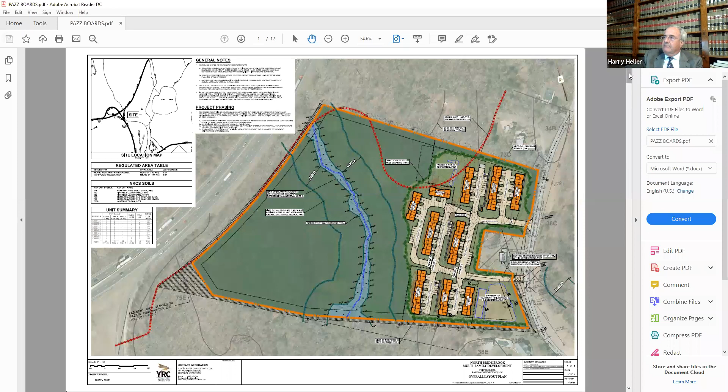Okay, I've now moved on to sheet 3 of the site development plan, which is the grading and drainage plan. You can see that we have 2 proposed rain gardens in the northerly portion of the site, incorporated into the design to capture some of the overland flow which is flowing easterly off of steeper slopes on the westerly portion of the site in the direction of the project. This allows the project engineer to capture some of that runoff and infiltrate it back into the ground in order to help attain the 0 net increase in runoff as a result of the proposed development. At this point, I'm going to introduce Brandon Hanfield to ask him to review with the commission the specific design parameters he has incorporated into this rather complex formulation that you see before you.

I'll switch, whatever you want. You want the biggest screen? Oh yeah, that will help. Okay.

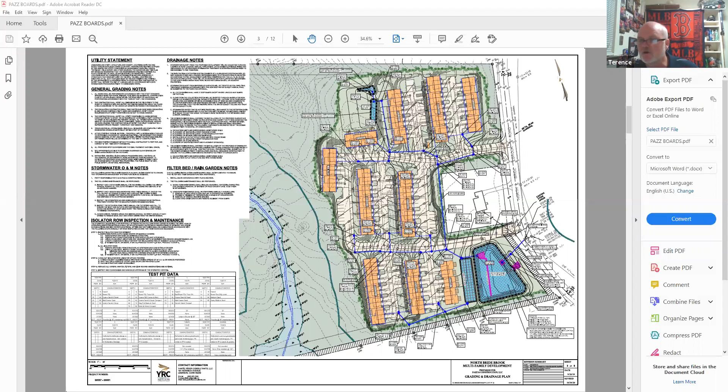Jim, are you there? Did we lose Jim? You can see him, but we can't hear him. He's not muted. Mr. Barbaras, can you hear me? Raise your hand. Okay, yeah, we cannot hear you. Jim, there may be an internal mute button on your computer. Remember we had a problem with that before? Yeah. Welcome to the world of Zoom. Mr. Heller, is there something else you could work on if we try to get this fixed? Yeah, well, let's let Jim try to figure this out.

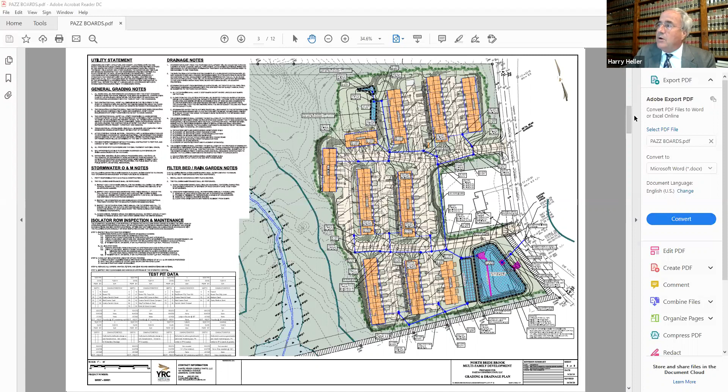So with that, I'm going to go down to the architectural elevations and ask Peter Springsteel if he could review with the commission the architectural theme for this project and how it's been formulated. Good evening. My name is Peter Springsteel. I'm a licensed architect in the state of Connecticut, and my office is in Mystic.

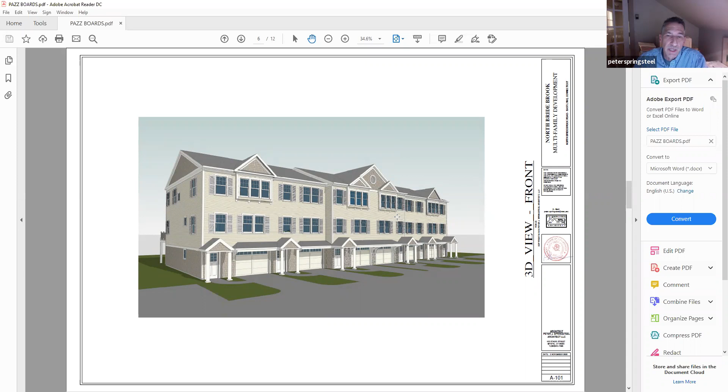So if you go to the next slide there. On the units that are built into the grade, you will basically have a retaining wall here instead of windows and doors out the back of the basement level of the unit. Your parking is beyond that, in the back or in the front really. And then these decks here will end up being more or less at grade, and then this grade will slope down on either side to the garage level entrance grade.

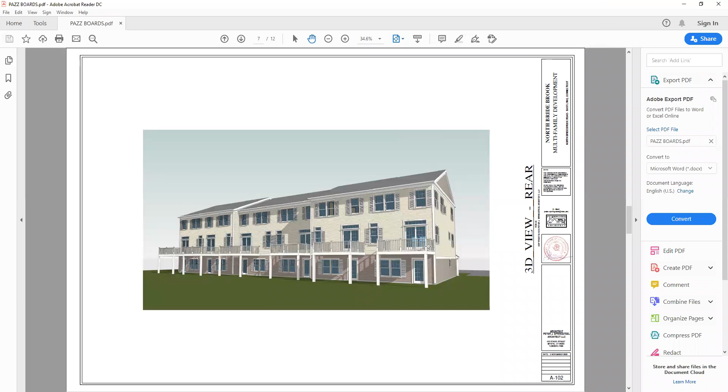The buildings' appearance will be New England style, essentially, with gable roofs, clapboard siding. You have shutters, double hung windows with simulated divided lights, which you can see a little bit in this diagram here, and then we would have architectural shingles for the roofs. Generally on the exposed bases, we use a different material, texture, or color to break up the height of the building, which you can see on the right-hand side there. And if we go back to the previous slide, you can see those breakups in the upper gable dormers and at the bases near the garages.

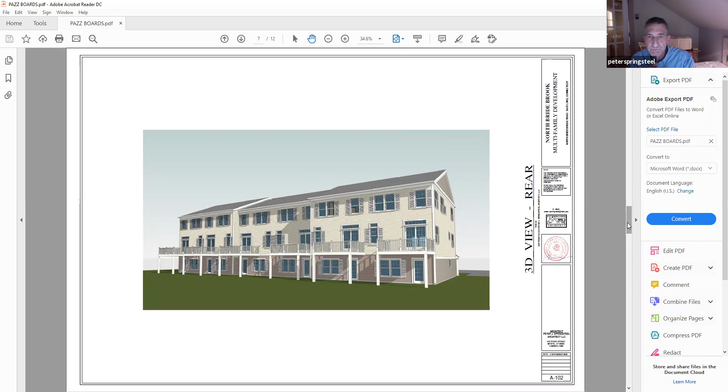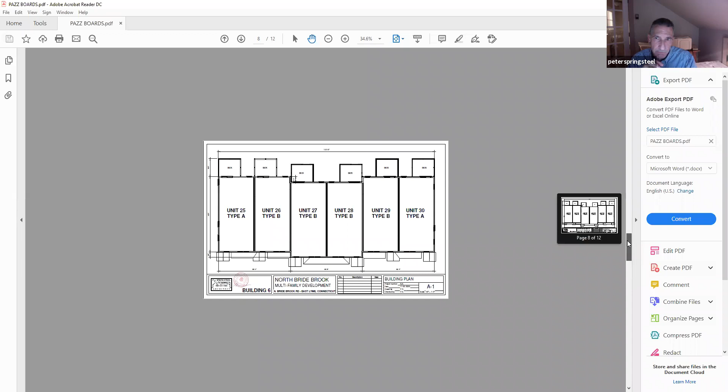So this is a six-unit building, which we have a couple of on the project, and we have different unit types in this building. Some of them are two bedrooms, some are two-bedroom expanded, and then we have a three-bedroom unit. I've blown up an example of a two-bedroom expanded unit, which is this one here - we're calling this unit type B. We are going to be required to have some accessible units in the project, and we will be able to accommodate those by taking the back end of the garages and building out living facility, bedroom and bathroom facility on that lower level towards the back of the unit.

We have two-car parking garages typically in these units, with entranceway at the garage level from both the garage and the exterior. Our mechanicals will be down there. Then we come up to a main living level, typically in all the units. It's very open, with a kitchen, dining, and living area that opens up out to the decks we were talking about, and a half bath. Then on the upper level, the third floor, we have the bedrooms, an office in the expanded two-bedroom, and two bathrooms up there as well, and the laundry.

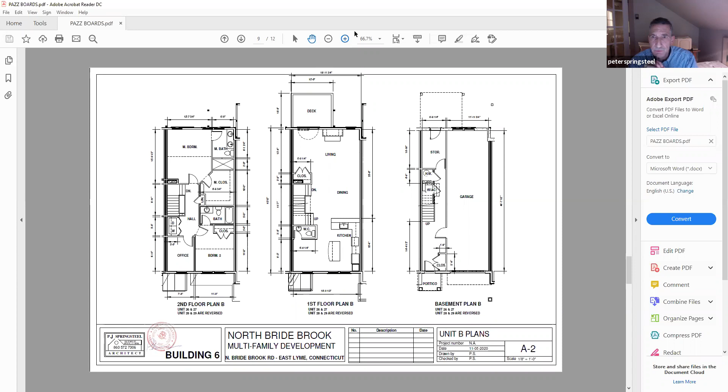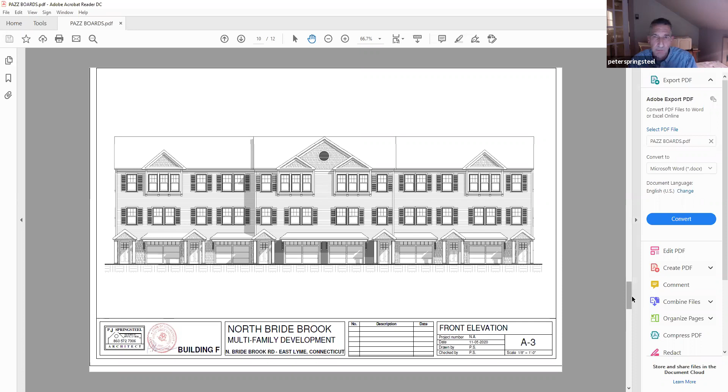And then if you move on to the exterior elevation views, here you can see we've tried to articulate the facades so that we break up what would otherwise be a very long structure into segments, both vertically and horizontally, with material textures at the different levels. We've got a covered entranceway to announce where you enter the buildings, which helps break up the ground plane as well. Generally speaking, the center group of units will have a bigger dormer on it to emphasize the center of the building, and we've got some projected bays also to break up that third floor. Essentially, that's it.

These are the side views, and the rear elevation. Again, on the rear, when we're built into the hillside, you're not going to have that bottom row of windows and doors—that'll be underground. So it'll appear as a two-story building from that side. And I think that's it.

Does anyone have any questions for Peter?

I have one. How many handicapped accessible units will there be total? I believe there's got to be 4. I think there's 1 per 25 units. I could be wrong about that, but I believe there's 4. Thank you. I think there's 8, right? Hold on one second, because I can get you an answer on that from the affordability plan.

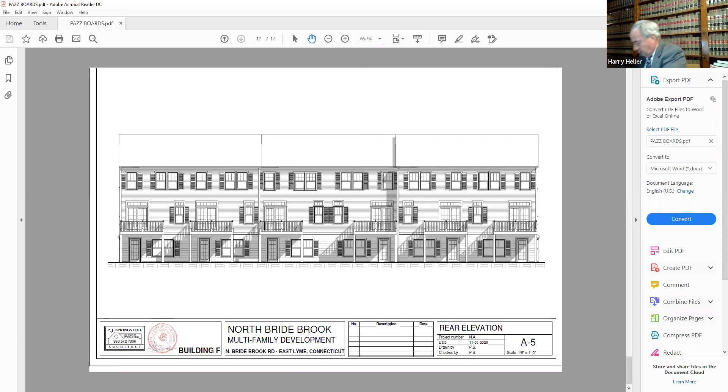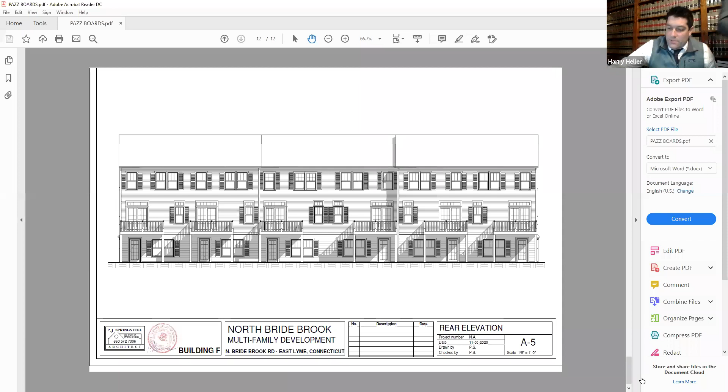I have a question about the landscaping. Okay, Brandon? Sure. Will you have any kind of landscaping between the project and the house to the north on Bride Brook Road? Or what kind of landscaping are you thinking about? Good question. Again, Brandon Hanfield with Yantic River Consultants. I'm just going to get back to a page that shows that.

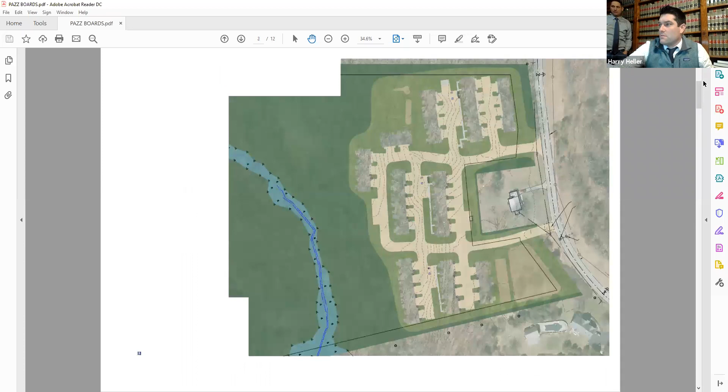Let's see, here we go. All right, and your question was, I'm sorry, could you tell me the location again? The house to the north—is there any kind of landscaping plan to kind of block it off or divide between the project and the yard to the north? There is, and it appears they're not showing up well, but the label is there. I think my color kind of overtook the trees, but there are 20 arborvitae screening trees, labeled here, spaced at 10 feet apart.

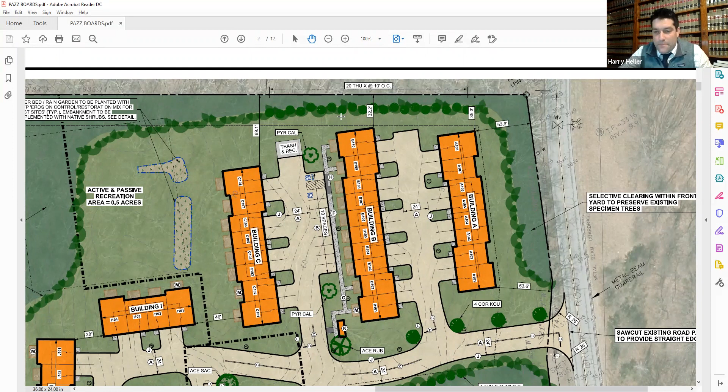Mr. Mulholland: I just want to add that staff is still reviewing this application, and as Terry and I discussed earlier today, we're going to ask that the public hearing remain open because we still have additional staff comments to get into the record. One of the issues I want to talk about is the landscape plan, and at some point, when we reconvene on the public hearing side, we'll have some better answers on the landscaping. One of the other things I want to talk about is the lighting plan and the lumens plan, so in the future we should have a little more detail on that to address Ann's questions. Thank you, Mr. Mulholland. And then, all the exhibits are online, so if you want to take a quick glimpse at them, you're welcome to do so as well.

Mr. Chairman, I reviewed the affordability plan. Three of the type A units will be handicapped accessible, and six of the type B units will be handicapped accessible, so it'll be a total of 9. That's good. Thank you, Mr. Heller. And since Mr. Mulholland mentioned it,

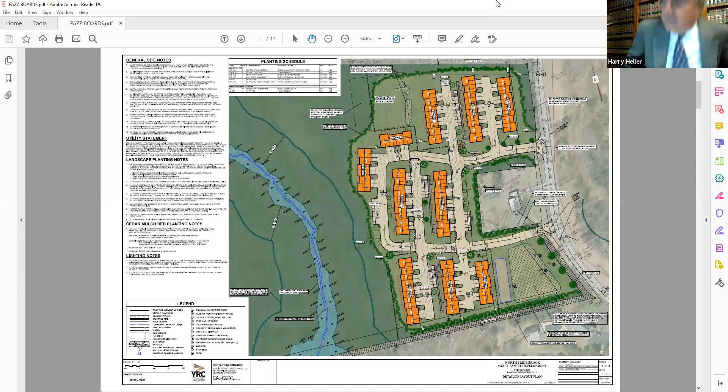Okay. Sorry, it's tight here. Okay, again, for the record, Brandon Hanfield.

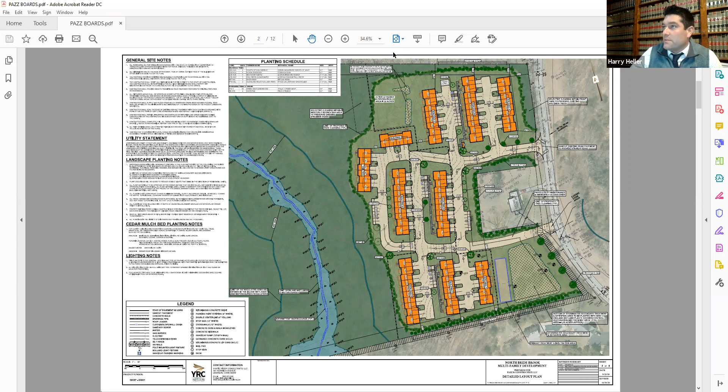We do have 25 pole-mounted area lights throughout the site. Basically, they are parallel with the main access drives and the secondary access drives. If we were to zoom into this plan, you can see the LPs here, and they're spaced between 60 and 65 feet apart. They are 15-foot high tall poles, and they are an RAB or a ROB LED fixture.

Which is fully cut off and designed to only cast light onto the areas that we want them. What we've submitted is a lumens plan based on the selected fixture, which is a type 3 LED, basically an oval or a longer shape. They also have a type 2, which is even longer and shallower to try to keep light focused onto linear elements such as a road.

So we did prepare a lumens plan based on the locations of all these lights and overlaid that on top of our current layout to ensure that we have adequate light for our roads, our walkways, and our parking areas, and also don't have light that trespasses onto adjacent properties.

You will see in that lumens plan, and it's the limitation of the program I'm able to use, that there's a little bit of trespass in this location right here. I apologize, I don't have the lumens plan loaded, but there is a little bit of light trespass in about the 0.2 to 0.1 foot candle, which is very low light. And that's a result of the limitations of the program I can use, because I have to select type 3 fixtures or type 2 fixtures.

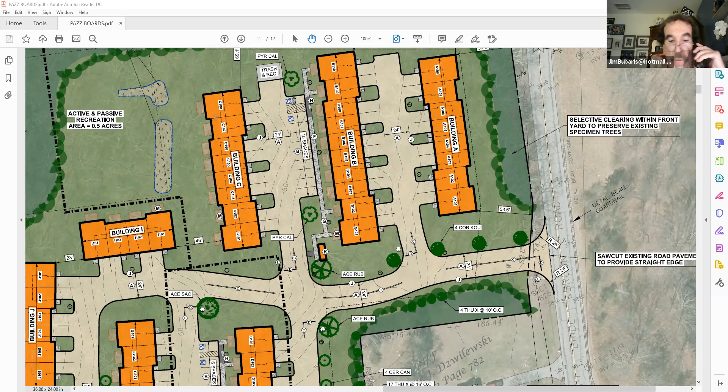So as was mentioned, this development will have one driveway intersecting the west side of North Bride Brook Road, and it'll also have an emergency access, but the main access will be the site drive as proposed on the plan on North Bride Brook Road.

What we did about 2-3 years ago, and we've confirmed these volumes are still valid, is we measured the traffic volumes on the street itself over the course of a week. What we measured at that time was 700 to 1,300 vehicles per day traveling on a weekday, depending on the day of the week, and about 1,000 vehicles per day traveling on a Saturday or Sunday. In traffic engineering terms, those are relatively low traffic volumes.

We also, at the time, measured speeds. The road is posted for 25 miles an hour, but we measured average speeds in the magnitude of 32 miles an hour, and the 85th percentile speeds, which is typically our design speed, at 36 miles per hour.

Excuse me, Mr. Bubaris? Yes. I'd just like to let you know that we are hearing you kind of staticky, so if you could try to speak a little slower and clearly, it would help us out, please. Sorry about that. Okay, that's okay. All right, so did you get everything I said about speeds? We heard quite a bit, but it was a little staticky there. Okay, go ahead and continue.

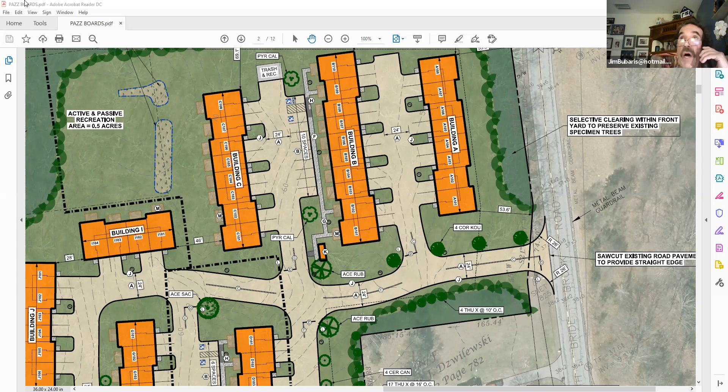All except one of those traffic crashes were one-car accidents, and they involved somebody just driving off the road, obviously driving too fast or probably under the influence, and most of them were at night. But none of them were in the vicinity of where the site drive is proposed to be. What we estimate is these 80 low-rise units will generate in the magnitude of 37 to 45 trips per hour during the peaks.

That is the commuter peaks in the morning and in the afternoon. And those peaks typically run between 7 and 9 a.m. in the morning and 4 to 6 p.m. in the afternoon.

Those volumes will be for those 4 periods, because it typically takes 2 hours in the morning for people to vacate, depending on where their job site is, and 2 hours in the evening to come back, again depending on how far away their work is. So for those 4 periods, we estimate 37 to 45 trips for each of those hours generated by this development. And a trip is defined as a one-way movement either to or from the site.

We estimate that as is the road itself now, the traffic is split about 50-50, 50% traveling northbound, 50% traveling southbound. We figure that would be the same with the trip-generated traffic. So what we would be adding is about 19 to 23 vehicles per hour in each direction, which is a very low traffic volume to be added by this development. That's about 1 new trip added to the system in each direction every 3 minutes.